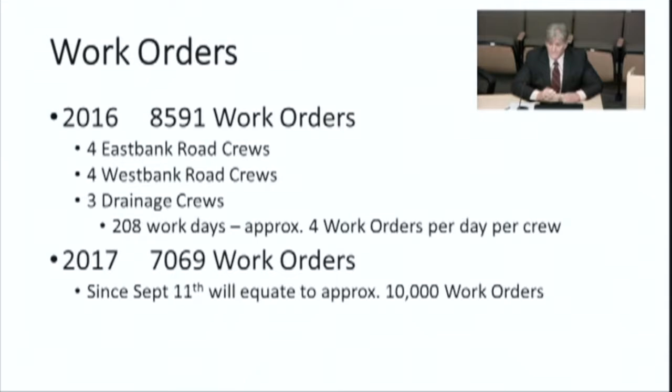We've implemented a lot of organizational changes, and rather than talking about the miles of road and pipe and ditches we've cleaned, I wanted to brief you on that.

We require all of our crews now to present a weekly work plan. They're due Monday morning. We also update that with a daily schedule that you get every day from Wendy in drainage and Keena in Public Works. So you do receive an update daily as we amend our weekly work plan.

Those work plans turn into a justification for overtime. On Thursday morning, all of the work crews are required to submit a request to Bob Williams for overtime. That is basically due to the work plan. We have break-ins where we didn't get to our scheduled work that we have to do.

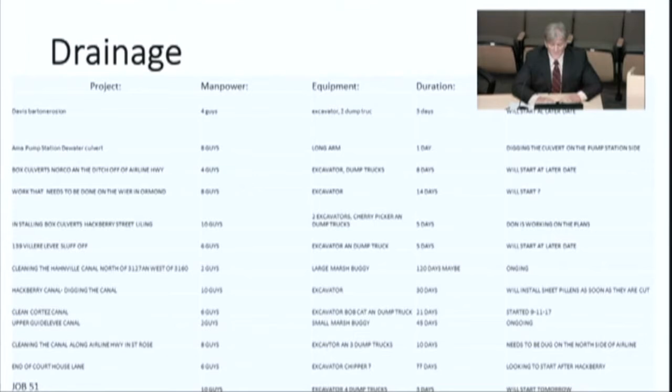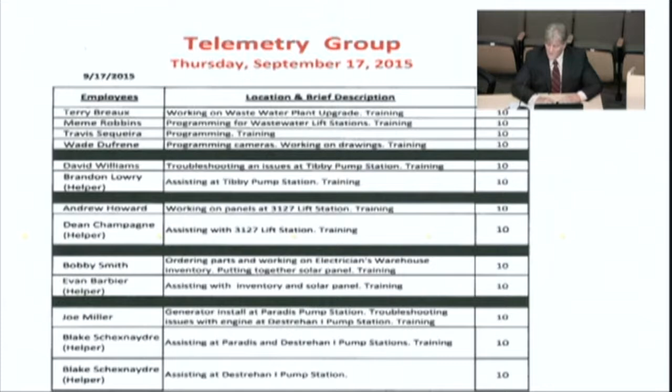Grass crews also provide a work plan. I'm trying to get through this fast. The parish has now been divided into zones because the QA inspectors go out and inspect the grass crews and the work that was done. We were having problems actually finding the tractor and grass crews, so we divided the parish into zones.

Now the QA inspectors as well as the area foremen know where the plan is to cut grass and where the crews are presently cutting. While there is a schedule to cut, due to the amount of rain we have, sometimes that does change. There are areas we can't get into because they're saturated, but it doesn't mean we stop. We continually move forward, and we just change our plan, and it's done by the weekly updates, the daily updates, and also, again, our Wednesday meeting.

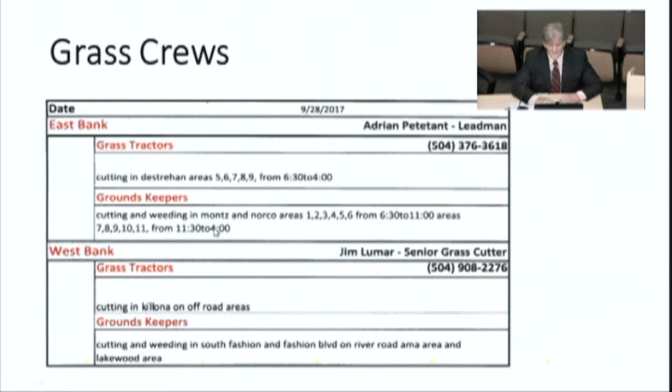The carpenter crews are no exceptions. They too provide work plans, whether it's driveways or catch basins. We do work for not only Public Works, but wastewater and waterworks and recreation. So when you think about Public Works, there's not an organization or part of our department in the parish that we do not do work for, especially when it comes to heavy lifting requiring heavy equipment.

We also talk about employee training. We sent 6 guys—3 electricians and 3 pump mechanics—to generator training and certification in Baton Rouge. We are now changing oil in and maintaining our generators for the parish. This is something that we used to contract out.

The electricians in the telemetry and automation group are doing our once-a-year checkup and load testing. We are looking at our pump mechanics. This is one thing I have been talking about since I came here, is to update the knowledge that we have in our pump mechanics.

What is our biggest asset in St. Charles Parish Public Works? It's our 160 pumps at 52 pump stations and growing. So it's one of our largest investments. We now have 14 Public Works pump mechanics and pump mechanic helpers that have volunteered on their own time to take a millwright class at Delgado. This is a certification class. They're committing to almost 1 year of 3 nights a week, and after that year, they will have a full millwright certification.

It then goes to a logic tree. The reason behind the importance of a logic tree is this is duplicatable. It also creates a learning. So when we go through the logic tree and we identify a problem and we work to mitigate it, that

becomes a learning lesson for all of the pump mechanics. The final third aspect of the RCA is to actually develop mitigation and a mitigation action plan. So we are now developing the action after the root cause analysis has been completed. This one right here is to install a debris basket in the sump and actually has a due date. When we do have asset management up and working, these items will be put in asset management, and this due date will be held, and the owner of that due date accountable. Here it's Chris, and we'll be following up with Chris to make sure that the debris basket got put in the sump.

This is something else we're doing. It's a pump out of service list that we've been maintaining. Every week it's updated. Mr. Tragg compiles a list of pumps that are out of service. It also lists the mitigation for those pumps if that pump station is not at 100%. We do have some of our larger pump stations actually built with an additional pump in case we had to pull one or one failed.

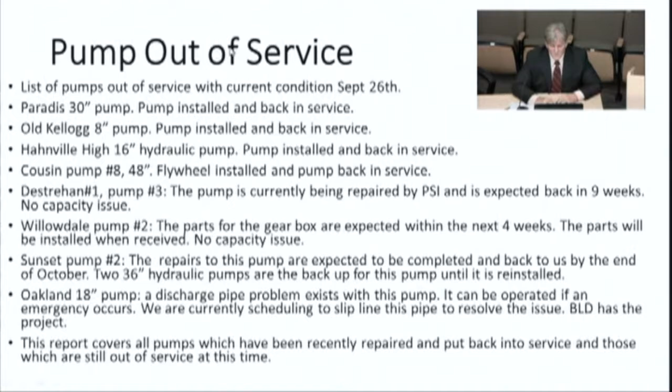So weekly, we do see a pump out of service report. We're taking it to the next level, though. We have put up whiteboards in our conference room. One of them is strictly for out of service pumps. This is what the whiteboard is going to hold as far as information-wise. It'll have the location, the station, the actual pump, the date of out of service, the reason. It'll actually have the mitigation on what we're doing to reach capacity. It'll actually list the capacity.

You will see 110% at Kellogg pump station, and that's because the pumps that we removed, the spares we had were actually larger and a greater capacity than the two that we removed. But they are our spare pumps, so as soon as these two are rebuilt. This was due to grocery bags that got in the sump and got up in the bearings and twisted around the shaft, and actually failed the bearings, but also wore the shaft. We're going to put a screen box in the front of this sump, and that way we'll be able to catch those plastic bags. Again, this will have to be closely monitored because any screen that you would put in here that would catch debris like that is going to have a tremendous tendency to block flow altogether.

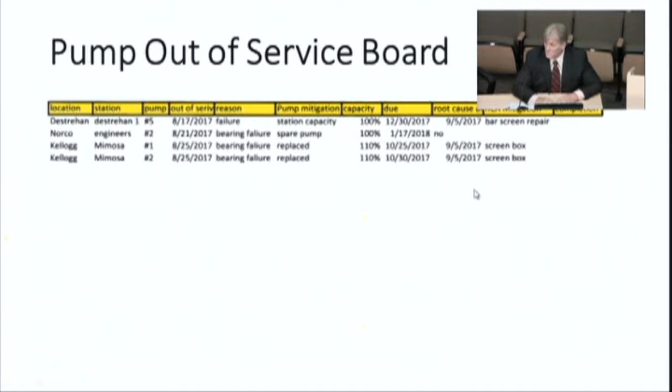This is our whiteboard. We're in the process of coming up with the organization of the information that we want on there. We do want to invite any one of you who would like to come by on a Wednesday morning to see what we do in either our projects meeting or our supervisors meeting.

We've also started every two weeks, we now have an organizational meeting for our foreman. So I bring them in now, and we discuss what's real in the field. You know, you get watered down information sometimes. So that goes two ways, from the top down and from the bottom up. So I've been trying to create that connection with the guys in the field. So I have been bringing them in.

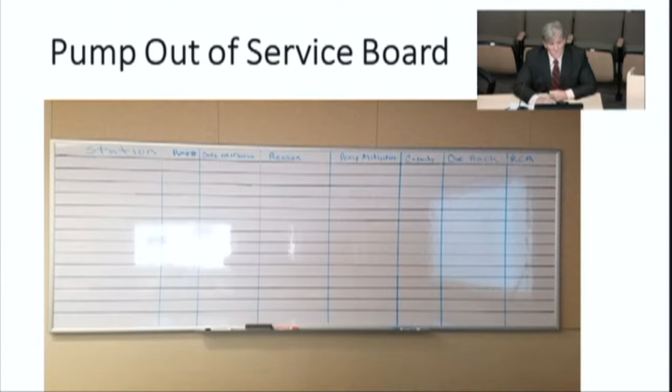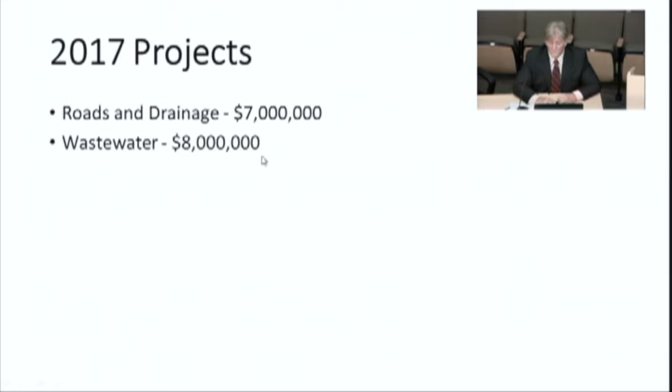In 2017, Roads and Drainage has completed about $7 million worth of projects so far this year, and Wastewater, which you mostly know, is about $8 million. And we're in the development of those. You've seen most of those contracts already cross your desk. We do have a couple more that will be coming. Some of the projects that were completed are Highland Estates and Engineers Canal Cleaning and Shoring, Hackberry Canal Cleaning and Shoring, Dunleith Phases 5 and 6, Mimosa Pump Station.

Parish-wide telemetry is ongoing at all the pump stations. We are focused on getting them all online. We have also implemented a secondary project to telemetry, and that is in conjunction with our failed pumps. Any pump that has failed will come up on telemetry, and that will be an alarm and recognizable. It will also send out a notice to Public Works in order to start the failure to start form and a RCA analysis.

Drainage gate at US 61 at Prescott - that's a gate we had been utilizing in the past, but only on a per-site decision. We installed staff gauges and level control gauges so we can calibrate the level controllers by the staff gauges. It's now on telemetry, and we can utilize this gate because it will give us an alarm when the south side of Airline Highway is lower than the north side. We're moving forward with this, working with Entergy to get power there, and once we do, this will be able to be automated.

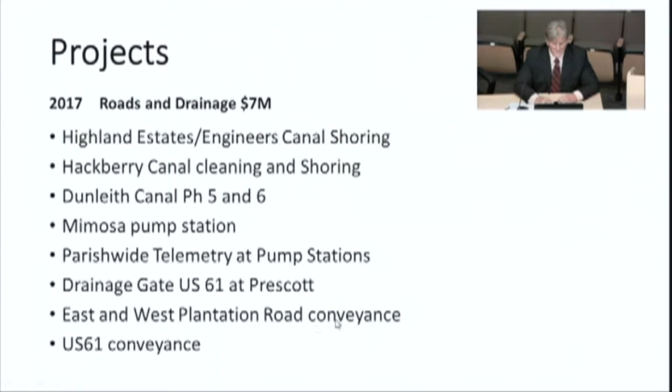We have East and West Plantation Road conveyance. We're installing subsurface there due to safety issues and erosion of the base of those roads on East and West Plantation. One of our big projects is US 61 conveyance, which I've talked about numerous times.

We've been focusing on the Ormond interior drainage impacts. This has a lot to do with LAMP and the flood insurance issues there, and the new BFEs. We're looking at Cypress Lakes retention, which hasn't been looked at in quite a few years, and the conveyance between the lakes in order to get that out to the pump stations.

Cortez Pump Station was a total rebuild, recently completed. Sunset Drainage Pump Station had pumps, addition of 2 new pumps, and we also rebuilt the 3 main pumps. Two have been completed, and the third is out, due next month.

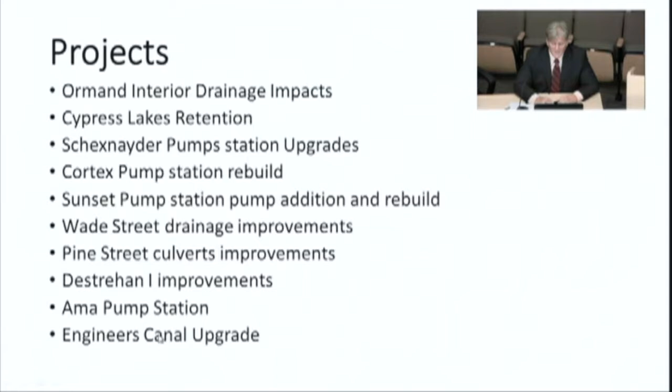Wade Street Drainage Project, which I mentioned, and also Pine Street Culvert Improvements, were all internal projects that were developed. Destrehan 1 improvements, AMA Pump Station upgrade, which you voted on at the last council meeting, Engineer Canal upgrade, and quite a few more.

We also developed 61 internal projects through our supervisor and planning sessions. These still need to be developed, prioritized, managed, and implemented. We also have a whiteboard up in our conference room, and these will hold the top 10 prioritized projects so that we can devise manpower, scheduling, and those type items to keep those moving.

I gave you a list of these 61 projects. I'm not going to go over them since you do have access to the presentation, I'll let you view those. These are the ones that we will be prioritizing, so you have the ability to go through them and add input if you would like. Some of these you may find additional work that you would like to have done - please feel free to provide that input.

One of our biggest sources of internal projects is canal cleaning. We presently have a full-time crew, sometimes two, depending on the amount of equipment needed. We've already been cleaning Cousins, Engineers, Hahnville Canal, St. Charles Canal, 80 Arpent, Hackberry, Cortez. The upper guide levee is the canal on the west guide levee of the Bonnet Carre Spillway going out to the lake - this is slated for about 45 days.

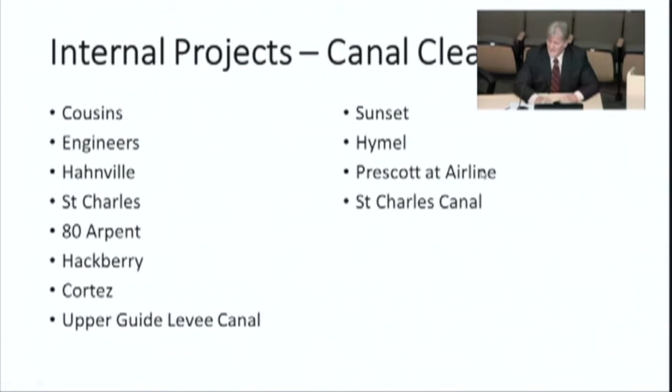We've been cleaning Sunset Drainage Canals, especially number 10 Canal, Hymel Canal. Prescott at Airline Highway was cleaned on both sides, and the St. Charles Canal.

Short term, we have recently received the, I call it the Ama Alice. This is the canal on the Parish line between Jefferson and St. Charles. It goes from the river all the way to the first set of railroad tracks and wraps around all the way to the Ama pump station.

Sugar House Road is working. We've met with Monsanto and are coming up with a plan for them to allow us to get on there and clean Sugar House Road all the way around, and also take sections out of the berm that was created due to cleaning in the past, to allow water to drain on the Monsanto property. We're also putting up a small berm on the residence side where the road dips just before Luling Elementary at Corville - I wanted to say Cortez, but Corville.

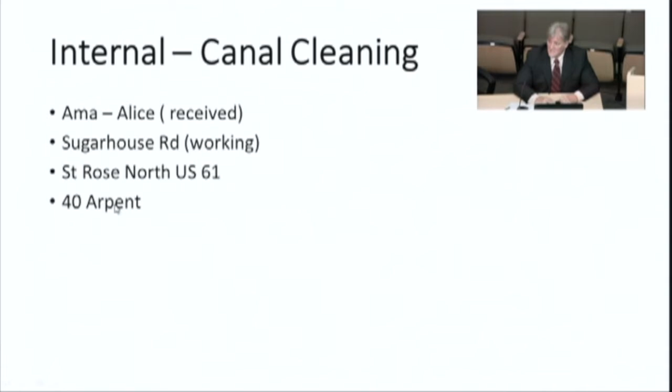We're also actively receiving feedback and giving feedback, and some of the residents from Hahnville actually sent letters to support the 40 Arpent Canal. We do plan on receiving that one very shortly.

To wrap up, I want to show you some pictures from some of the more complex jobs we're doing, so you can see we're not just doing normal work in public works.

These are 5x10 box culverts. We actually had to rent cranes large enough to set them. These culverts were inserted into the number 10 canal crossings - the last 4 crossings that needed to be upgraded. We laid our own friction piles, and we put in our own aggregate.

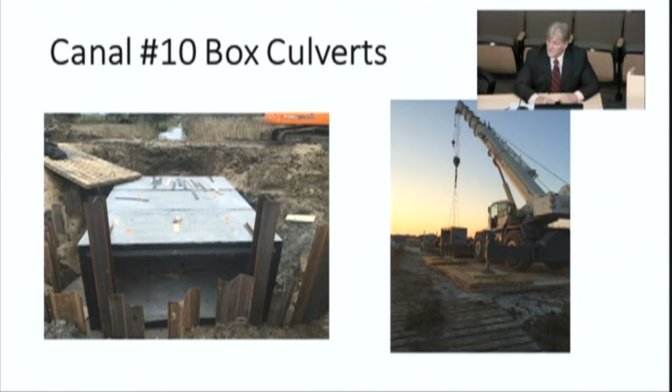We sheet piled it, and then set in the culverts and also pinned them in place. This is a very complex project and was completed very successfully in-house.

Hackberry installation. The Hackberry Canal went close to one of our churches, within about 4 feet, so we needed to install some 72-inch culverts to have confidence in the outfall and not eroding underneath the base of the church.

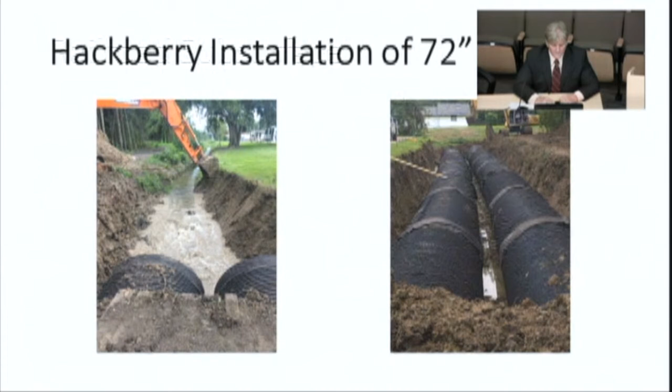We are also subsurfacing along some of the railroad tracks in areas where we cannot get next to the railroad and between the residents. It's very expensive for us to get what they call flagmen - it can be up to $800 a day to get flagmen certified by the railroad to flag for us while we're doing work to clean out these ditches.

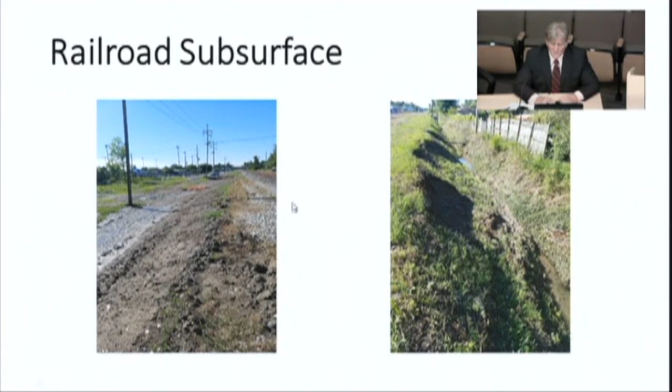It is a long and very hard process to get approval by the railroad. A lot of times we end up putting crews in to manually dig these areas where it's sloughed off. So we made a case to the railroad that we're also protecting the base of the railroad, and they allowed us to put some subsurface in along there.

That was actually by the splash park where the kids were. We're actually going to do the Thomas Colby side - we're waiting for approval right now and the okay to use the flagman. So we're going to do the stretch between Scheck-Snyder to River Point, about 700 feet, and then we won't have to worry about that anymore.

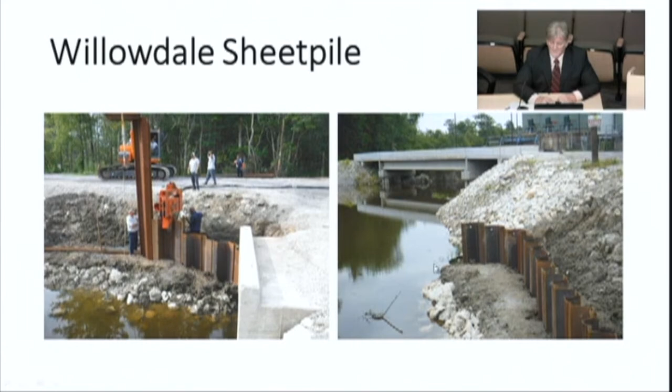Here's Willowdale sheet pile. The basin caved in, so we actually sheet piled it ourselves and cleaned the basin.

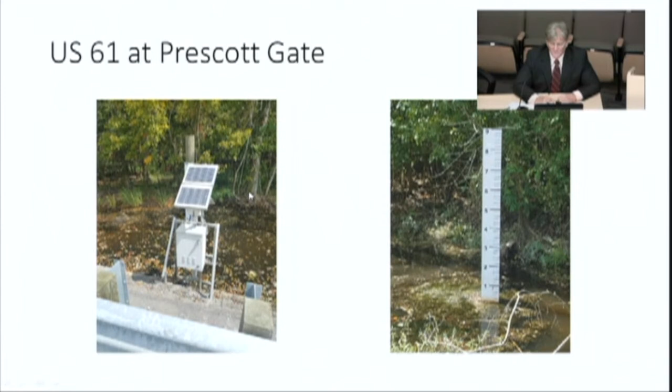This is the US 61 Prescott gate, where we installed the staff gauges and level controllers so that we now have level control on both sides of Airline Highway. This is a tremendous help to Muntz because the water doesn't have to go to the pump station any longer, and with the cleaning of the upper guide levee, it'll have a clear path all the way to the lake.

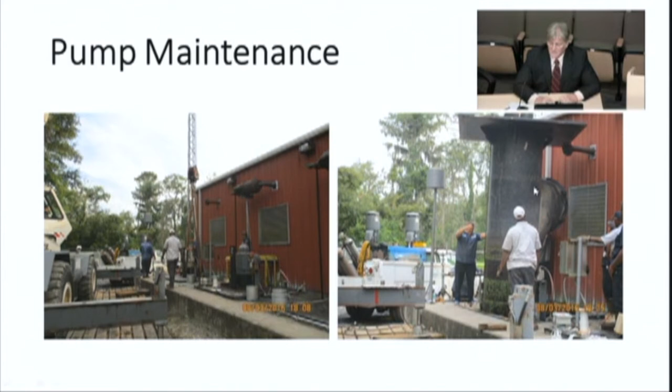Again, we're doing a lot of pump maintenance, and we actually rented a crane to pull these pumps ourselves. Another step forward for us.

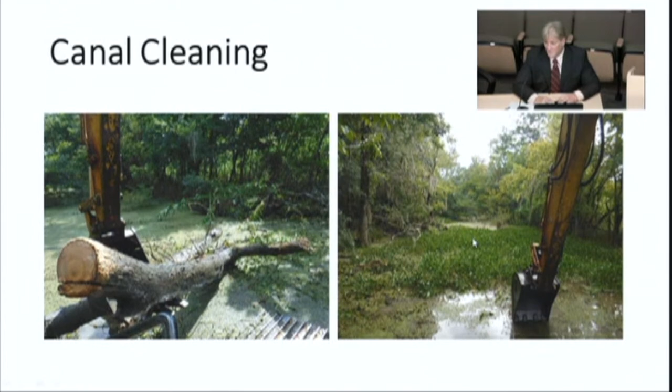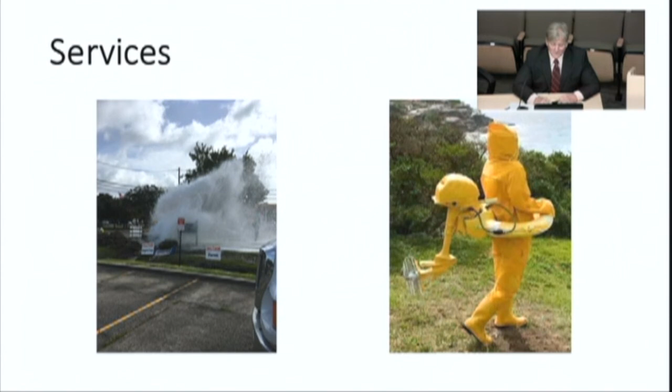And here were the new uniforms. We were looking for Public Works - you know, we got so much rain over a period of time, we figured that maybe we should relook at the uniforms and the strategies we were using.

The significance of this is twofold. One, our average rainfall for this area in Louisiana is 62.4 inches. We have already received, in the first two-thirds of the year, above our average rainfall. And if you could just visualize 2 feet of water in any one place, that is approximately the additional rain that we received through this period of time.

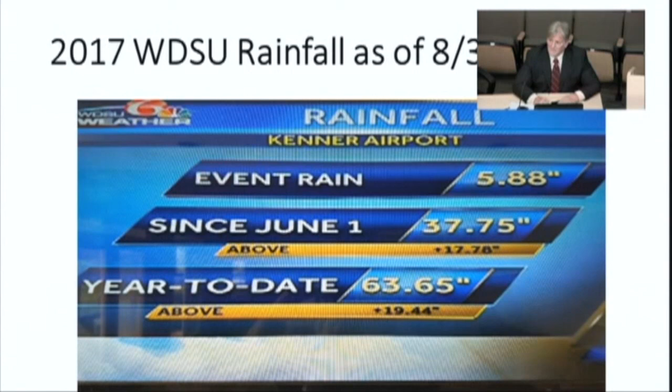And I appreciate it. Any questions? And I hope I didn't put you to sleep.